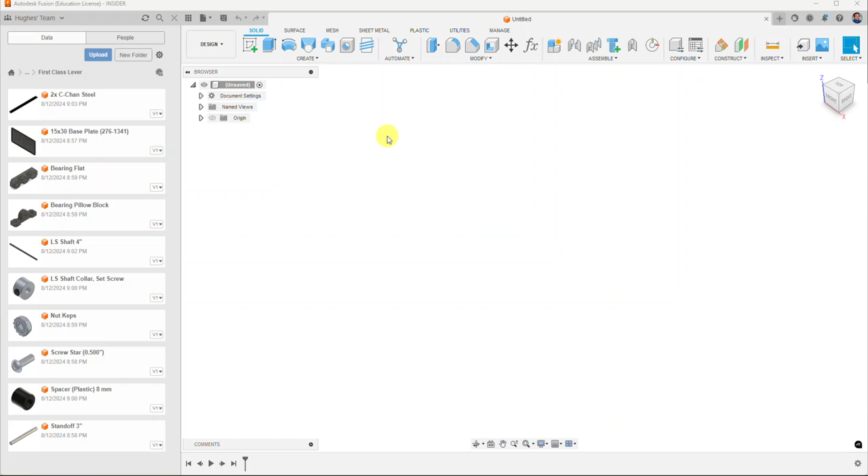The first one I'm going to start with is the base plate. Before we get started, just want to note that we have an untitled design file open right now. I'm going to click the save button, and in the name we'll call this first class lever, then click save.

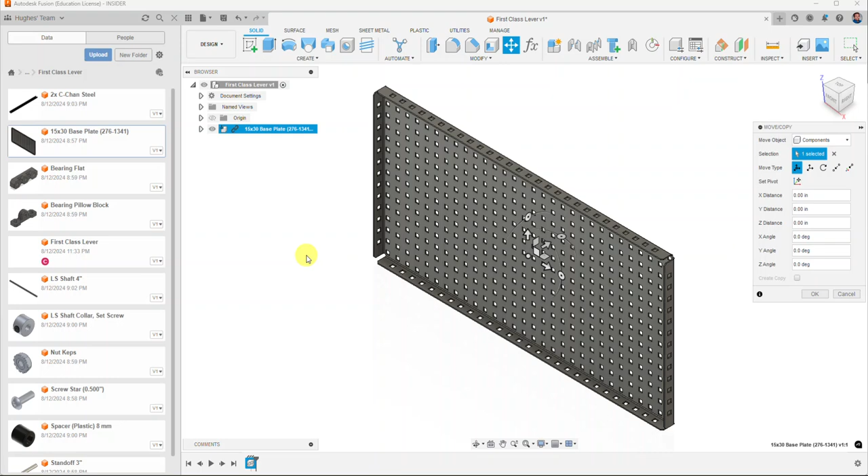Once I have that, I'm going to right click on the base plate file and select insert into current design. The way the base plate file comes in, we may need to use the grips, the little circular grips, to rotate this down 90 degrees. We want to make sure our quick menu shows 90 degrees, and I'm actually going to rotate this another 90 degrees because of the orientation I have this set in. I'll go ahead and select OK on Move Copy.

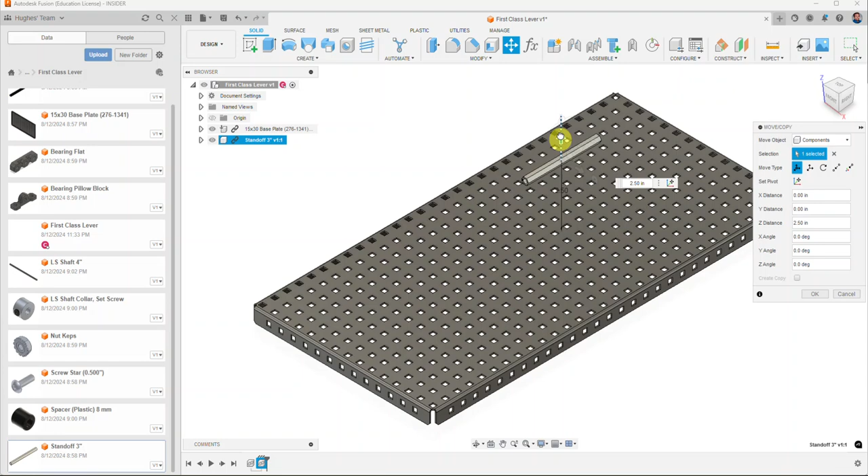The next thing I'm going to do is bring in a 3-inch standoff. I'll right click on this and select Insert into Current Design. When I bring this up, I can use the little arrow grips by clicking and holding down to drag them, so I'll drag this up just so I can get it out of the plate here, and select OK.

Before we get moving, I'm going to right click on this base plate component and select Pin. This used to be called Ground, and now it's Pin. So we're going to pin this, and if I click and drag on the base plate, it will not move, but I can still click and drag on the standoff.

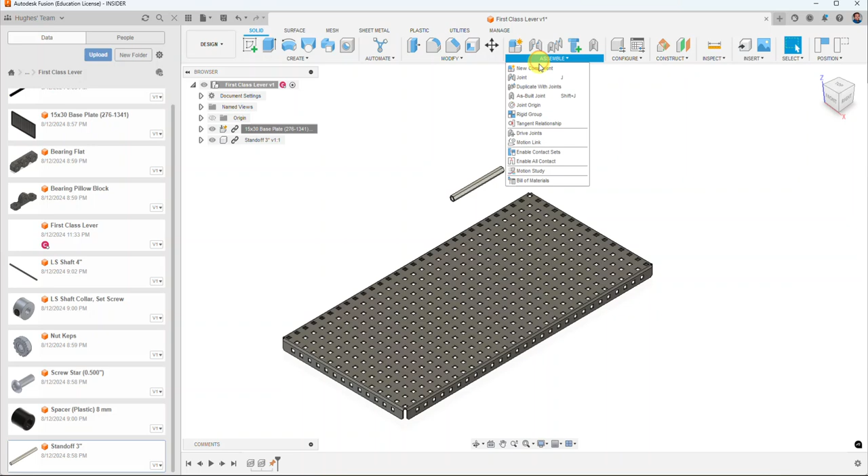So what we're going to do is go up here to the Assemble panel and grab the Joint command. I'm going to zoom in real close. There's a circular edge on this that will highlight and become bolded, and the joint origin will show up right in the middle of the circular opening on that standoff. I'll select when I see that, then zoom out.

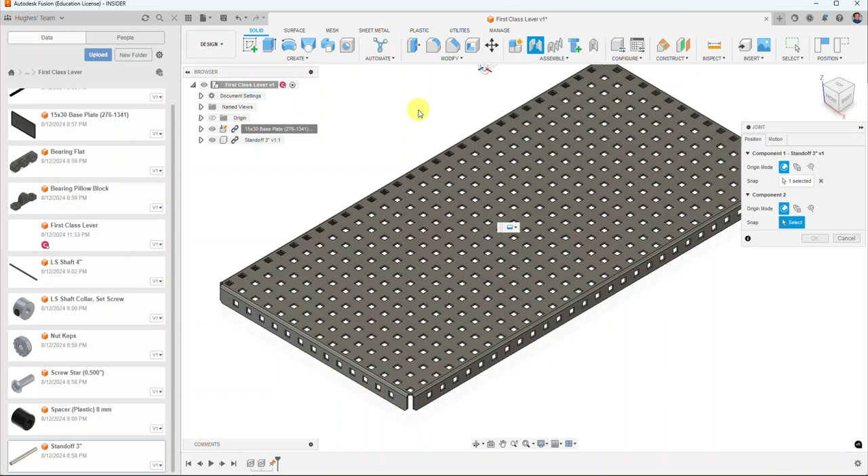On our base plate somewhere, we can just go with an approximate location, so maybe right about here on this hole, I'm going to click. I want to make sure my cursor stays on the face so you can see the selection shows all those points. I'll hold the control key, or on a Mac, hold command, and go up here and select one of the edges like this. It doesn't quite get it over the hole, so I'm going to drag the offset over by 0.1 inches.

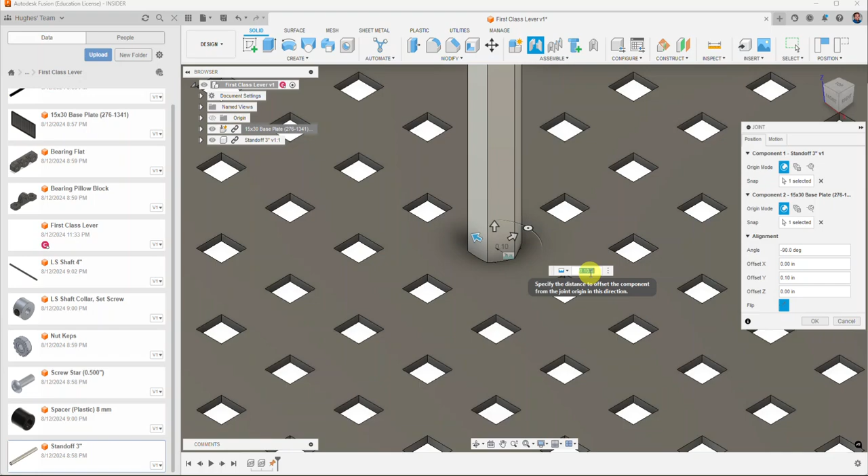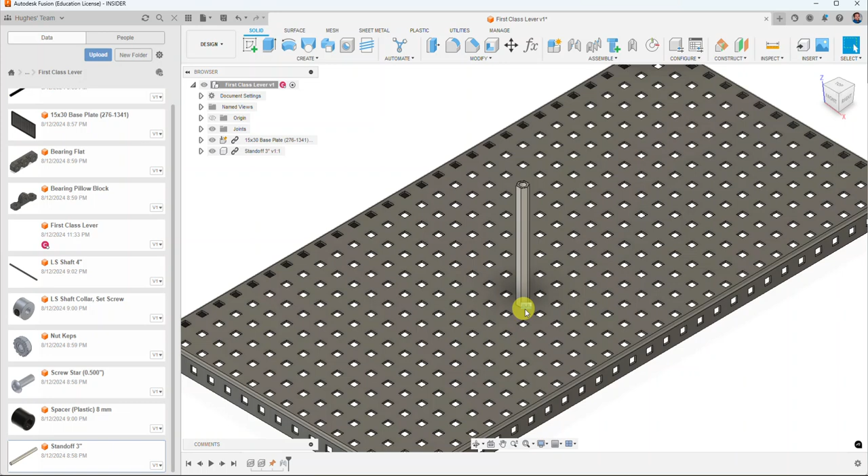If I keep this open and rotate with the view cube, you can see the hole opening right over, as if we were going to place this on top of the base plate and run a screw up through the bottom. I'll select OK. You'll see these little joint glyphs show up, so I'm going to hide that by clicking on the eyeball next to the joints folder, and we're just going to clean up our assembly that way.

The really neat part is we're going to add something called, in the Assemble panel, Duplicate with Joints. It's a new feature that just came out around spring of 2024. Duplicate with Joints asks first to select the components, so I'll select the standoff, and then it asks what's the next snap point.

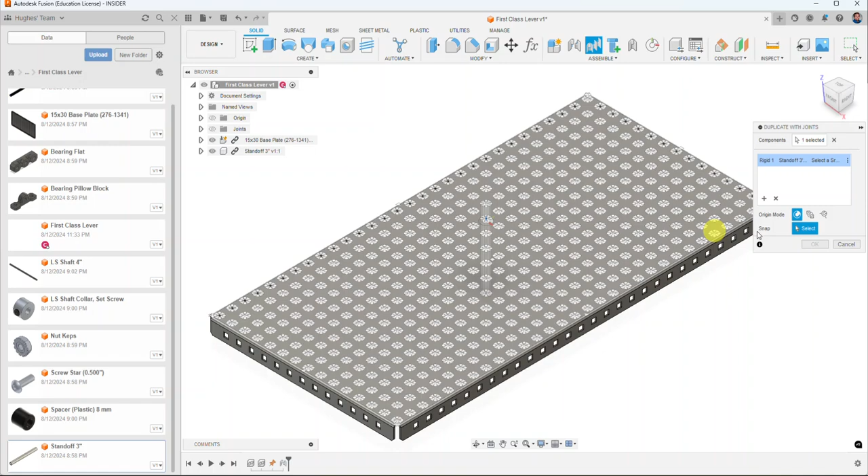Along this same column, I'm going to skip this hole here in the middle, and pick the same exact position as before. Notice it puts another component and applies a rigid joint to that one. I'll keep this command active, and going across here I can see I've got one hole here, 2, 3, 4.

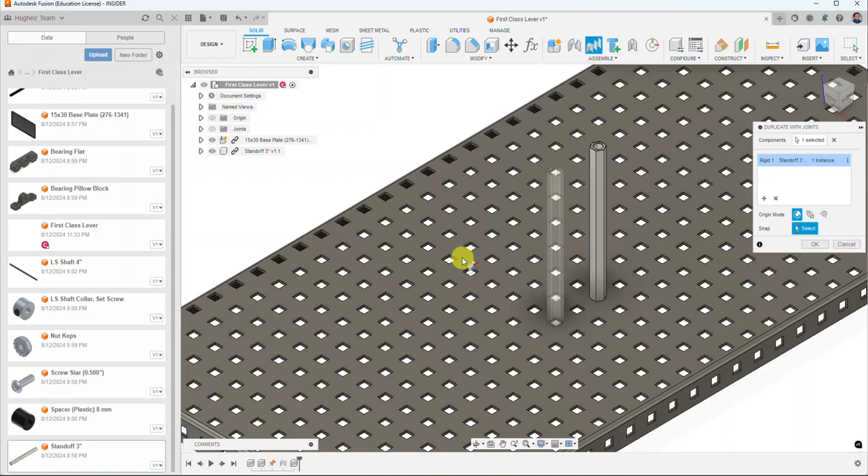On the fifth one, I want to go ahead and place a point. I'm going to hover in there and click to place. I should have 4 holes between these 2 posts. And then the same thing up here, I'm going to click in the same position and place 2 of those, so that way I get a set of 4 standoffs.

If I check my joints folder, I can see I've got 4 rigid joints, each one copied over with the same thing. So now I can go ahead and also look at adding in another component into here. I'm going to collapse this joints menu, and we're going to take a look at adding the pillow block bearing.

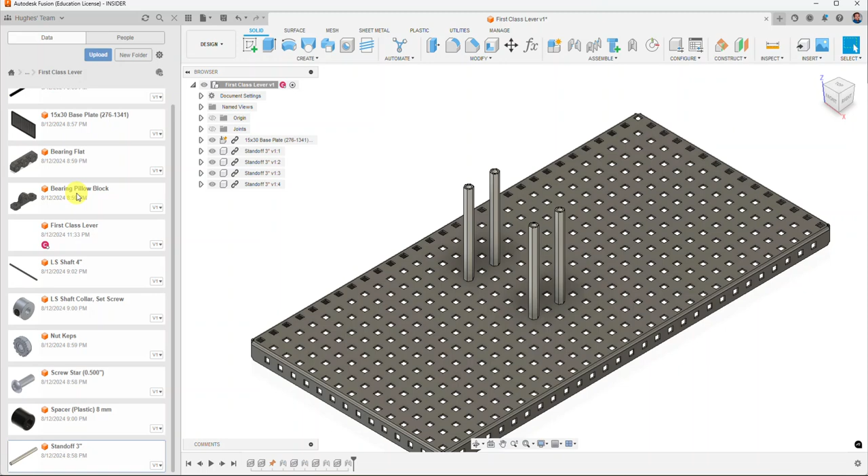So I'm going to right click and say Insert into Current Design. I'll bring this up and select OK. I'm going to just go ahead and hold the Shift key and click on my mouse button to rotate so that way I can see underneath. I'm going to run my joint command again.

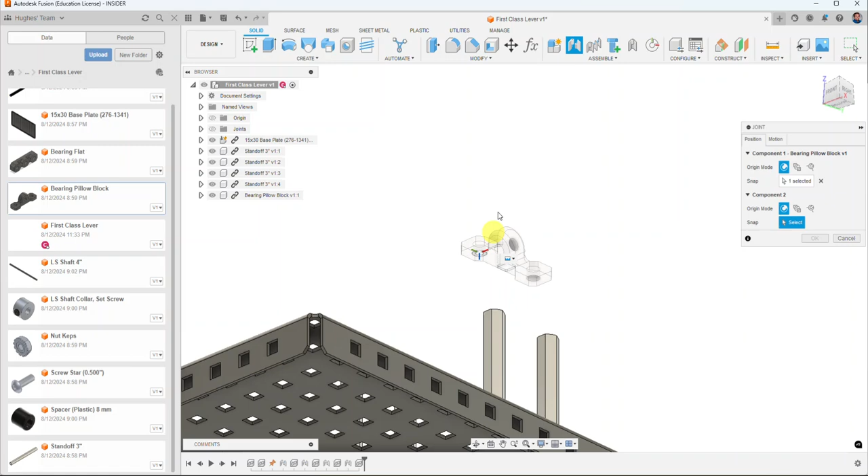I usually like to pick on, anytime you're on a circular edge like this, I always like to make sure to click the edge of the circle. So I'm going to select it, rotate back down, and then find again the circular edge right here on the standoff. And when I click, it's going to bring that into place.

If it happens to, don't forget to flip. Your flip menu is right here. So if it brings it in like this, you can always flip it, and that way it does that. It usually depends on which direction the joint origin operates. I'm going to go ahead and select OK.

Same kind of scenario, I'm going to go up here and go to Assemble, Duplicate with Joints, select that component, pick on the same exact place as what I did before, and it's going to add another one with a rigid joint right there. While we've got this kind of placed, I'm going to go ahead and add in some of the 1/2 inch star drive screws.

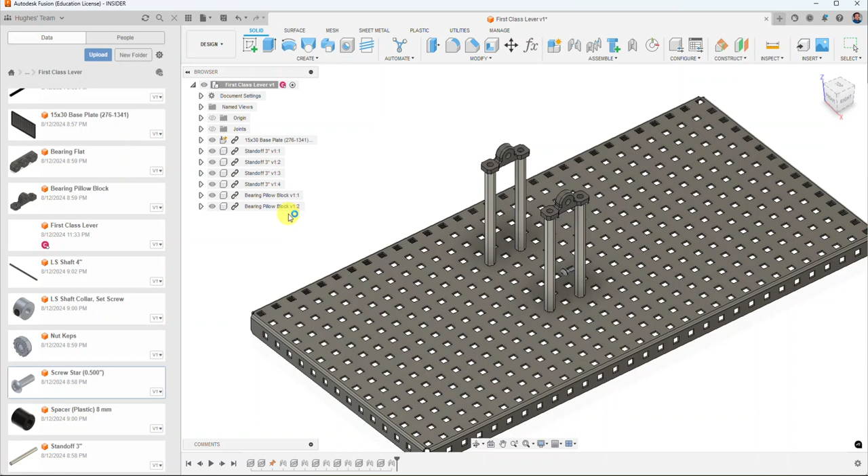So I'm going to go ahead and select Insert into Current Design. I'm going to drag this up here just a little bit, and I'm actually going to rotate this so that way I can kind of see the underneath side. It looks like I'm going to put this in upside down, but I'm doing it so that way I can go ahead and just select my joint command.

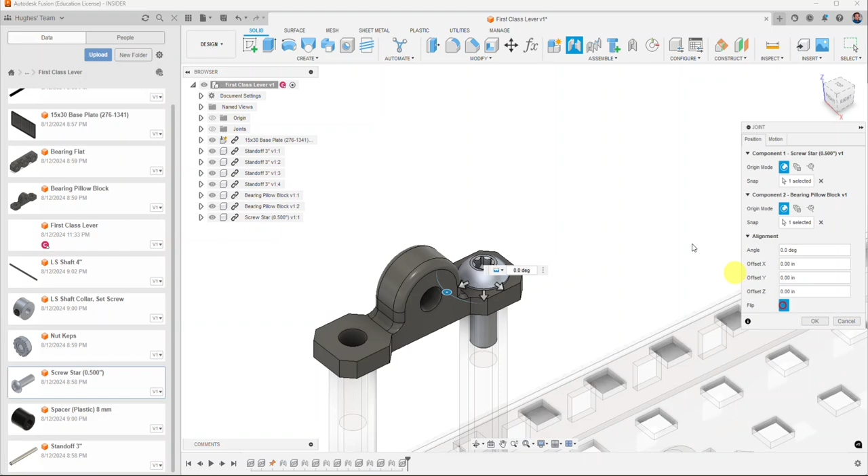I'm going to select the circle that's right underneath the screw head here, and I want to go ahead and place it right there. And I do want to flip it so that way, notice how it wants to kind of carry that over. So now it's going to put a screw in there, which is how we're actually going to build our assembly. I'm going to select OK.

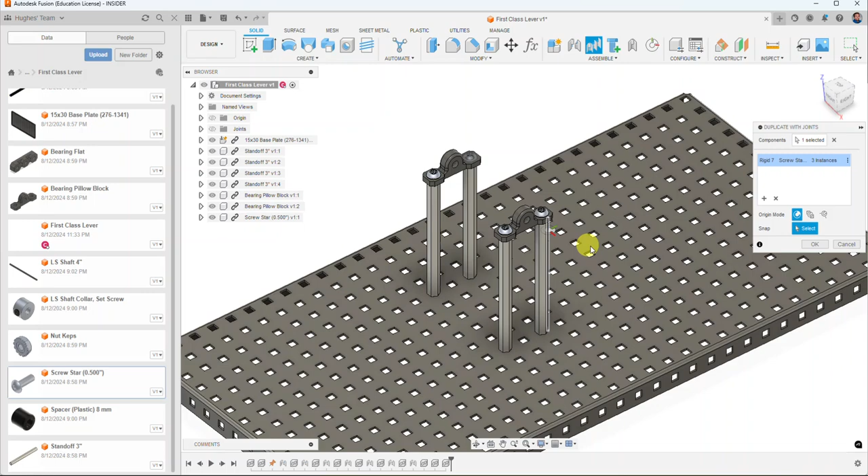Very similar, I'm going to go ahead and say Duplicate with Joints, select my screw, select the circle, and it's going to add another one in there. I'm going to go over here and do the same thing. Click, and when I see the outside edge of the circle highlight, now I've got screws all placed in this particular spot. I'm going to rotate down.

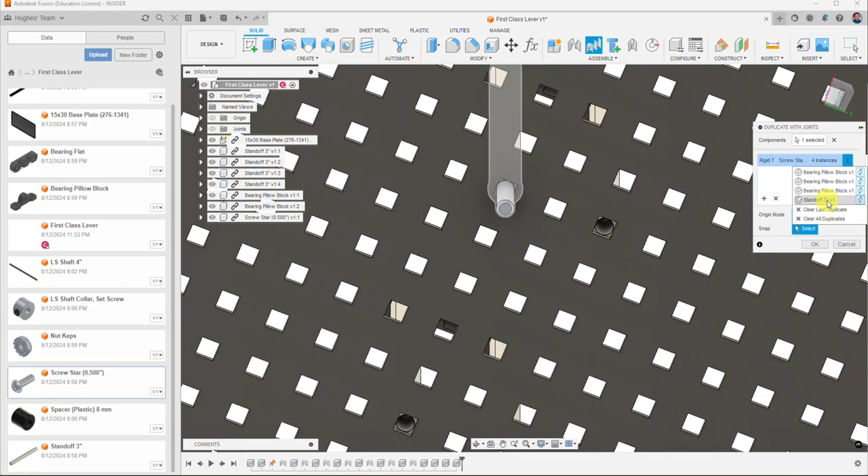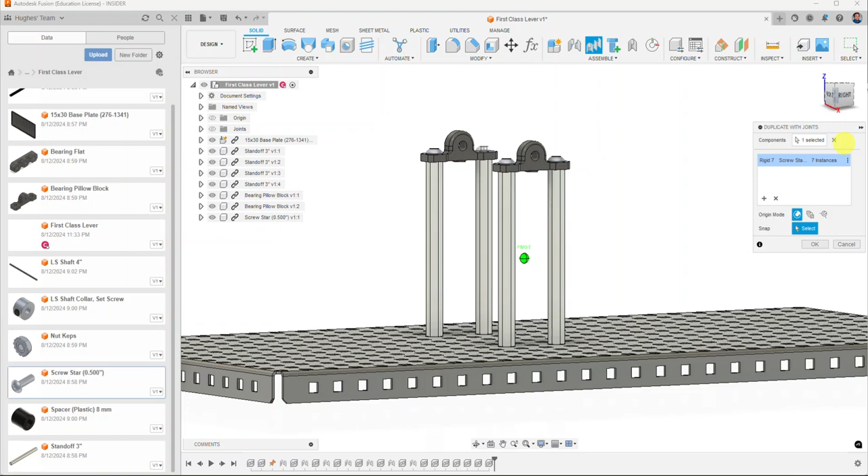If I click the flip button in here, it'll flip it around. I want to kind of draw your attention to that because the same kind of thing will happen. I'm going to go ahead and place the remaining 3 because it's going to do that for all 3 of these. Click the More, flip the last 3, and then that way all the screws go up into to hold the standoff to the base plate. So that'll also tell you what kind of thing that you have going on here. I'll go ahead and select OK.

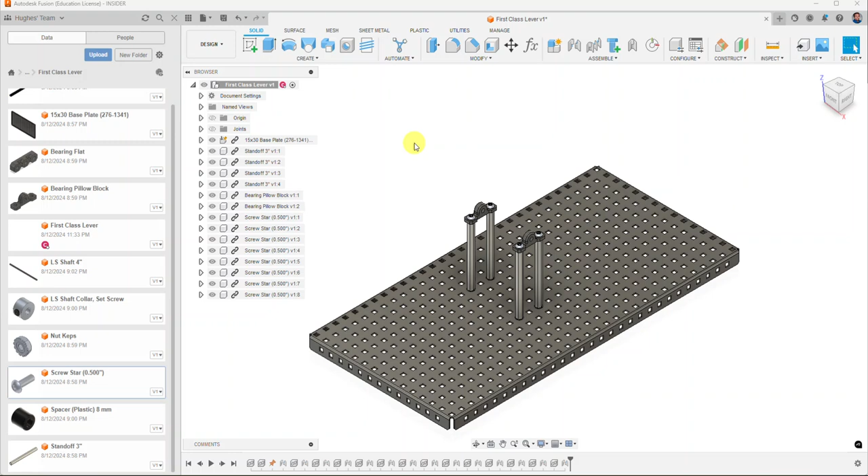So as you notice, once you select OK, it does add all those components into your listing, and it also has all the joints added to your joints folder as well. This will get us, at this point, a great stopping place, and a good start for our assembly. In the next part, we'll look at adding in the C channel and some of the other little components to connect it to these uprights, and look at finishing out the assembly.